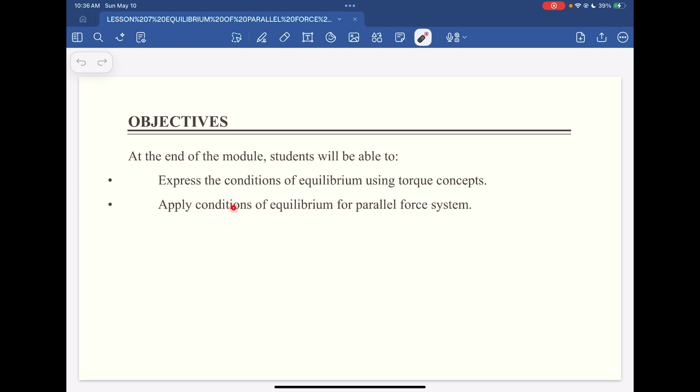So we are done discussing the equilibrium of concurrent forces. So for this one, we will be having the equilibrium of parallel forces. Okay, so at the end of the module, students will be able to express the conditions of equilibrium using torque concepts and apply conditions of equilibrium for parallel force system.

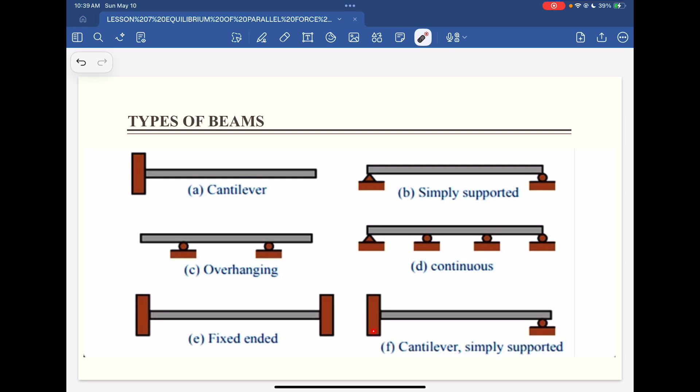For fixed-ended, both sides are fixed. Next is cantilever simply supported. So, we have here the fixed side and then the roller. So, kahit na reverse side siya, okay lang po. Same tawag sa kanila.

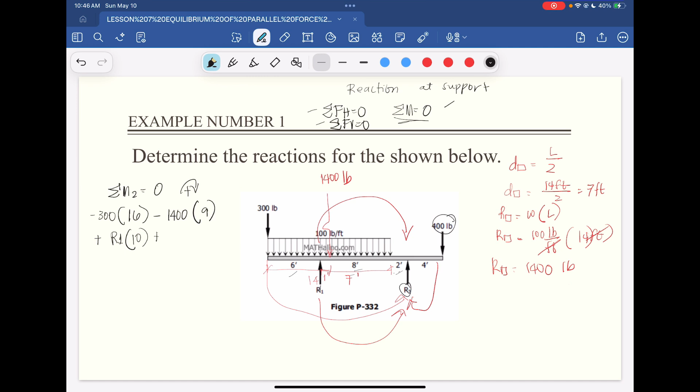So, iikot po siya kay R2 ng pa-clockwise. So, positive R1 times yung kanyang distance, which is 8 plus 2. We have 10 feet. And then, lastly, meron pa tayong 400 pounds na iikot kay R2 ng clockwise din. So, 400 times yung distance niya na 4 feet equals 0.